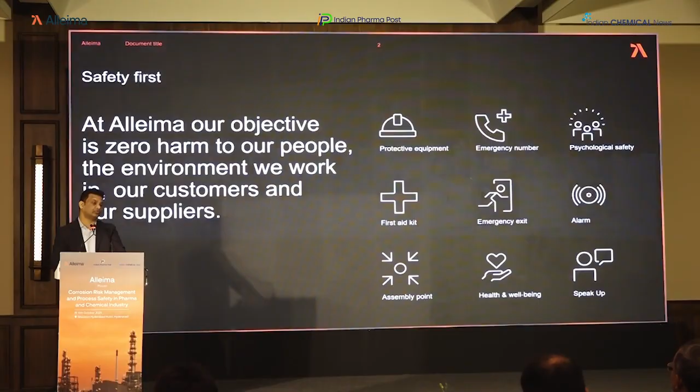So we are not only a product supplier, but also a solution provider. We have an advanced tube manufacturing facility within India and across the globe. So I'll give you some information about the company.

As I told, this is a very old company, 160 years old. We survived so many years because of innovation and because of the culture we have. On 31st August 2022, we became a new brand, Alleima. The word is invented with the symbol A, which pushes the line, representing crossing the boundaries. Allais is the ancient French name, which is called alloy, and MA means material.

So this is the history of the company. We started in 1862 in Sweden, and we kept on inventing newer and newer alloys, and by 2022 we became independent. Some highlights: seamless tubes we started producing in 1888, and in 1985 we invented duplex alloy. This was the biggest innovation we did—two phases, ferrite and austenite, mixed together to become one different material called duplex. That is our invention. And then so on, we kept inventing duplex, then super duplex, then hyper duplex.

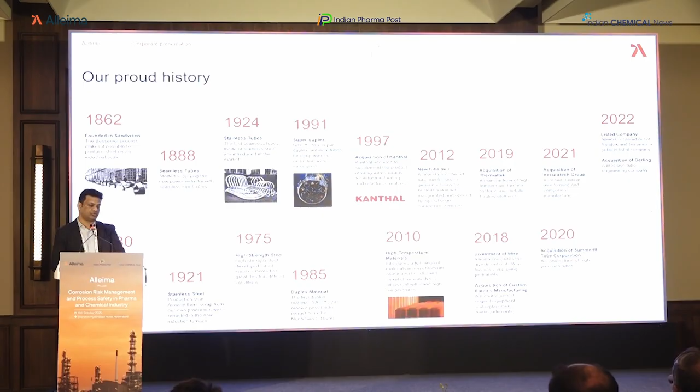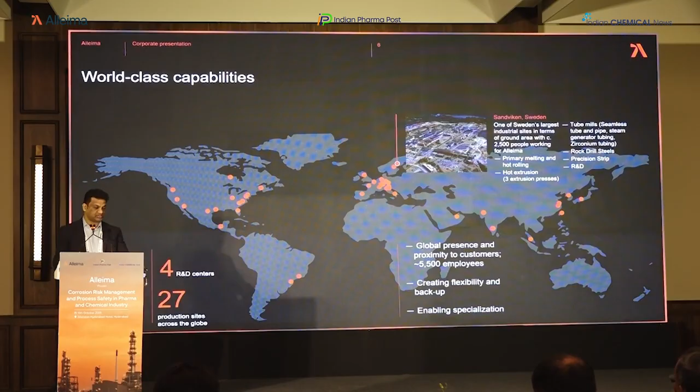So any furnaces or heating material required for heating, resistance alloys we manufacture. We also have some medical companies acquired in other parts of the world. Our base is in Sweden. We have 90 sales offices, 4 R&D centers, operations in 40 plus sales offices, and 27 production sites across the globe.

Sustainable steel—sustainability is very important for us when you look at the environment. 80% of our material is recycled. When I say recycled, it takes a lot of effort to refine the material, and you need to put a lot of production cost into refining it. But it is important to give something for the next generation. So this is the challenge we have taken.

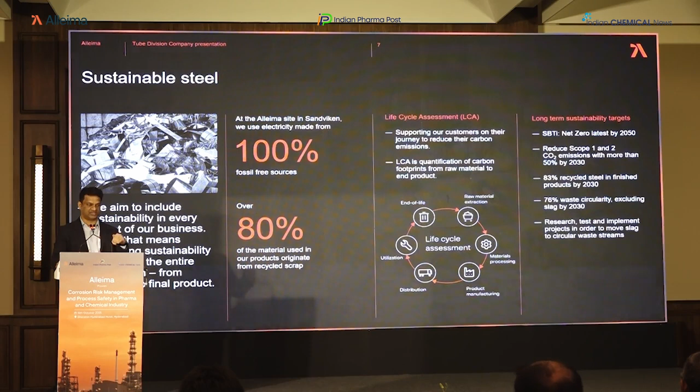Also, in Sweden, we have 100% fossil-free energy consumption. Our aim is to go up to 83% by 2030. Again, from here, adding even 1% is a challenge. So maybe Paresh knows that adding 1% of refined steel—used steel made into reusable steel—is the biggest challenge.

So then we have the tubular solution, which is a bigger chunk of our revenue. Then we sell bars also. Then again, a heating system, as I told you.

We have a precision strip product, which is the flapper valve you've seen in a slide, which is in your refrigerator or AC with a 5-star rating. It depends upon the flapper valve, how many times it opens and closes within a second, that decides efficiency. We have the material which opens 35% more, meaning the intake to the compressor is more, exit is more. That AC will give the effect in the same duration time. So that product we manufacture.

Then we have the medical wires and then coated strips. This coated strip is a new product invented by us, used for hydrogen vehicles and hydrogen energy transformation, which we have developed. The percentage is less currently, but we estimate this will grow in double digits in the near future.

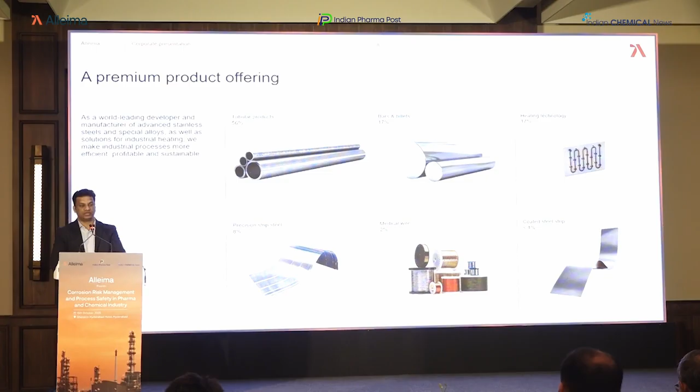So we are there in all the industry sectors, right from refinery, industrial chemical, specialty chemical, oil and gas, then heating materials, then consumer products - for example, if you're using Gillette, the steel used by Gillette is manufactured by us. We've invented and changed the recipe over many years to give more shaves, because we've added certain elements to give the edge retention property required for that material. So in some way or the other, we are touching your life from the day you start.

So then we have into power. Nuclear is the biggest sector for us - we supply steam generator tubing in the nuclear sector. Then we are into mining sector. The aero industry is also a biggest industry for hydraulic and instrumentation tubing, where we supply titanium tubes.

Medical is another industry where we have a wire developed for cochlear implants, invented 10 years back, and we hold the patent. We have a tie-up with an Australian company. So those across the world who are born deaf can hear because of the wire we produced, since we've added certain elements which give vibration and convert it into sounds.

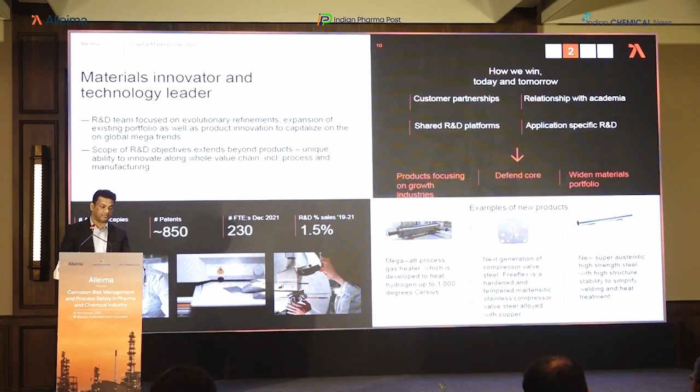So we have a fully integrated value chain. When I talk about a fully integrated value chain, it means we melt our own alloy - we're not buying anything from the market. And our development starts from the innovation.

So we have tie-ups with many licensors. They come to us if they want to change any pressure, temperature, or chemical composition, then they throw a challenge to our R&D - this is what we wanted to develop - and then we tie up with them and develop alloys. Certain tests take long, and we have industry partnerships with universities to take their help. We have our in-house R&D facility and a lot of equipment where we can do trials along with customers as well as licensors to develop new alloys.

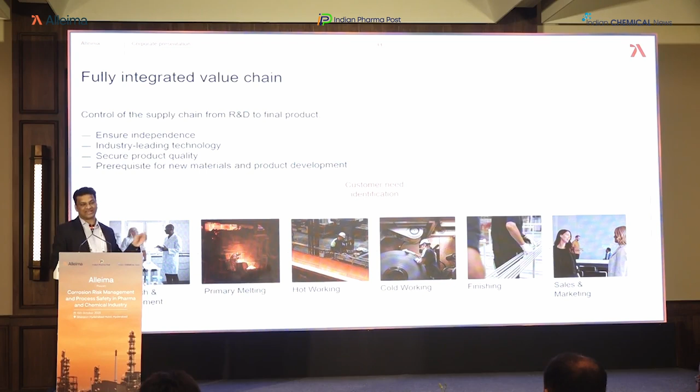And then we go for the melting of that alloy, then hot working, cold working, finishing, and the last step is sales - I stand last. So R&D stands first for our company.

So I will give you a glimpse about how a tube is manufactured. This is of course a visual, but you will get a fair idea right from melting to the finishing of how a tube is manufactured.

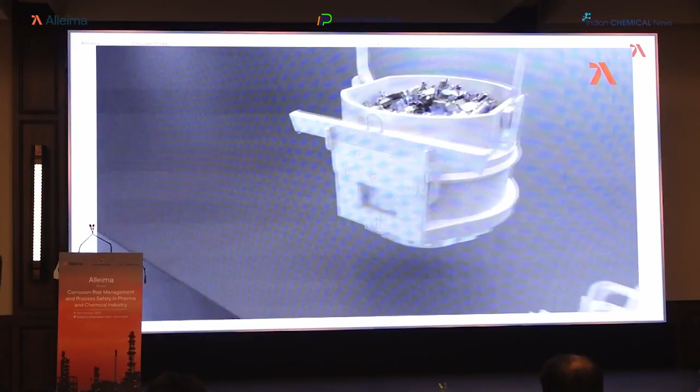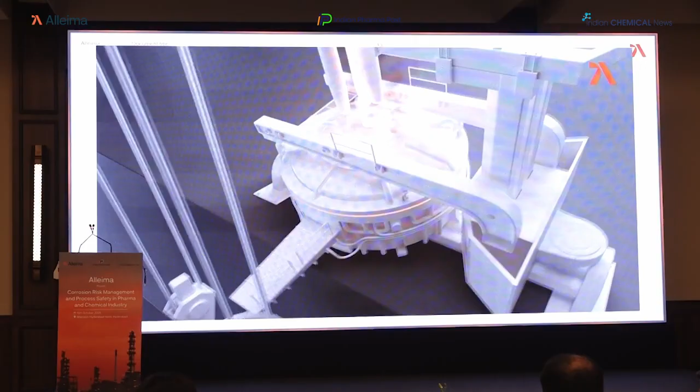At Alleima, manufacturing is based on recycled steel and purchased alloy materials. We buy high-quality scrap only from certified suppliers. The raw material is analyzed and any harmful ingredients are carefully removed. The scrap is melted at 1,600 degrees Celsius in an electric arc furnace. In the argon-oxygen decarburization vessel, carbon content is reduced to stainless steel levels.

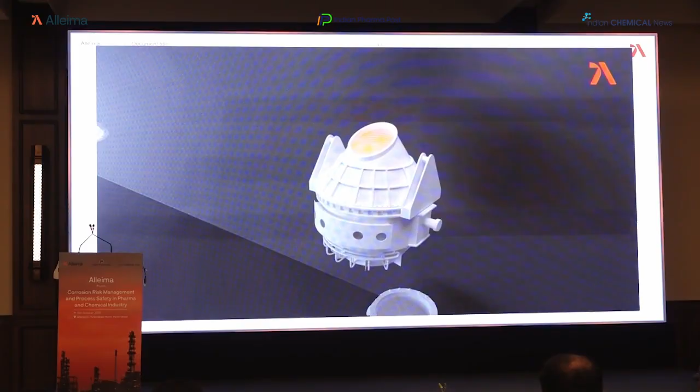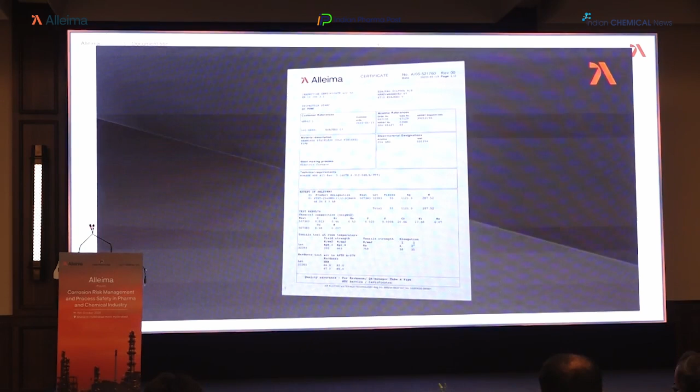Exhaust gases from the furnaces and AOD processes are filtered to cut pollution, and the dust extracted is further processed for metal recovery. The chemical composition of the melt is closely monitored throughout the process to meet our own demanding standards. We make continuous analysis to guarantee the correct steel grade and ensure traceability and consistency between batches. The results are entered in a form that accompanies each batch at every stage of the process.

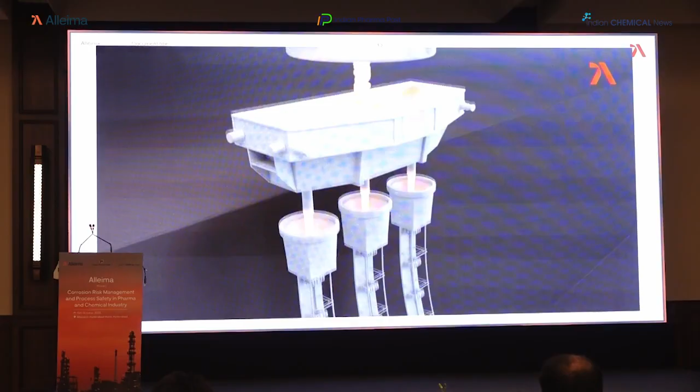After pre-rolling of continuous cast material or ingots in the blooming mill, billets are transported to a heating furnace to be reheated to the correct rolling temperature.

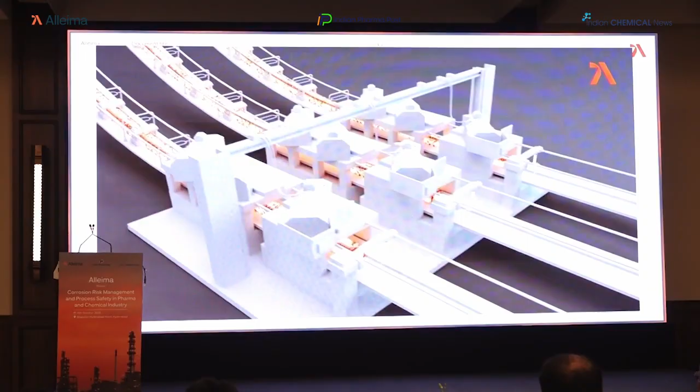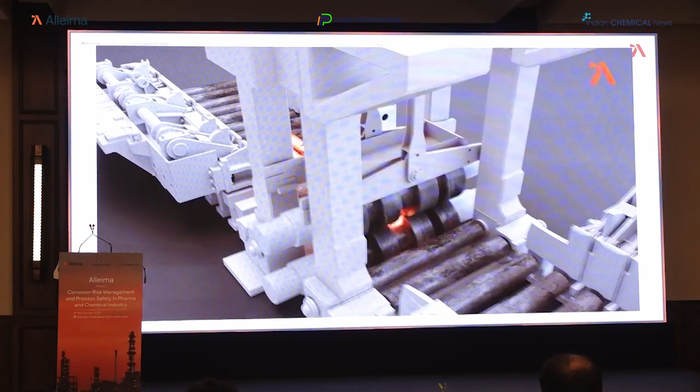The billets are then rolled in Alleima's modern rolling mill, where round and square billets are rolled to a wide variety of sizes. The new mill provides quick product dimension changeover, short lead times, energy savings, and excellent product quality. The mill is integrated with the blooming mill to form one continuous production line.

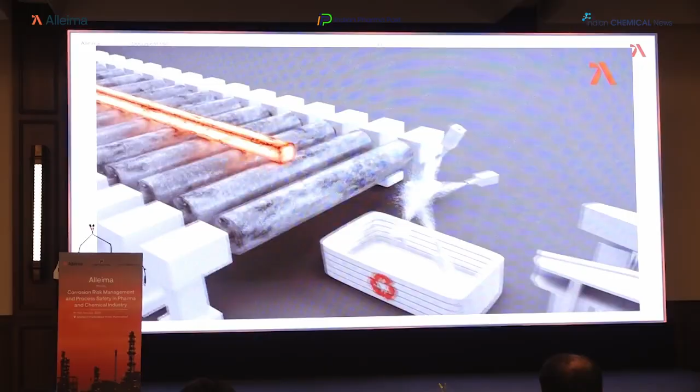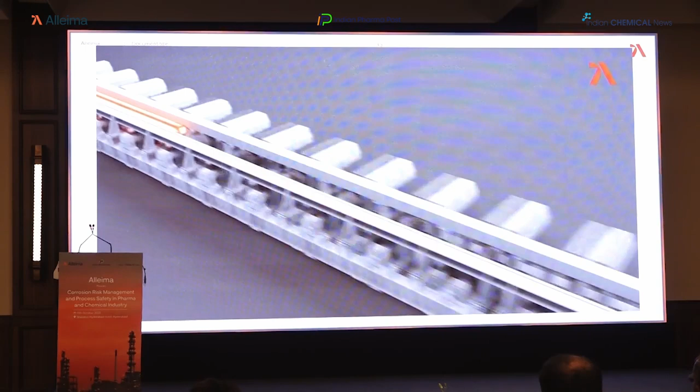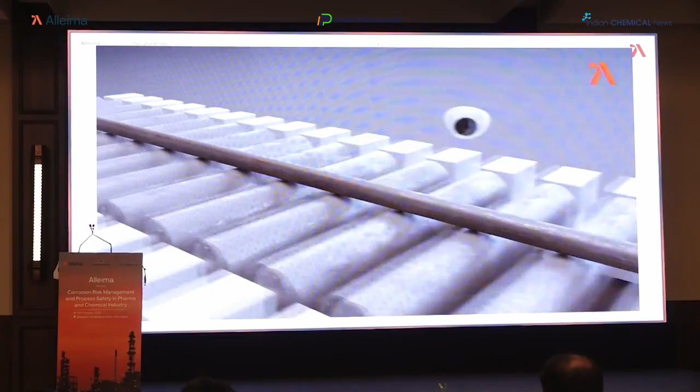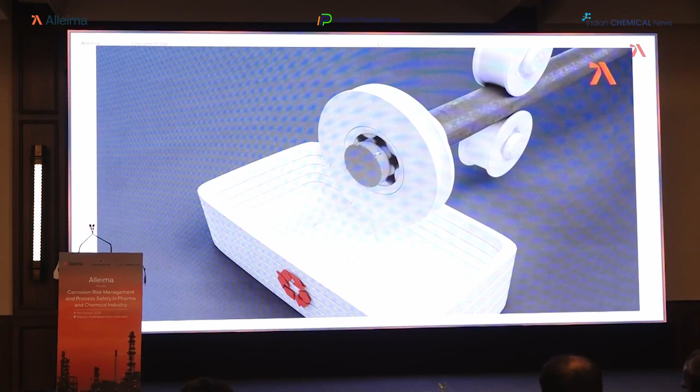Billets and bars are rolled to finished size in 1 to 6 passes, and cut into requested lengths. The bars are inspected before dispatch or put through further internal processing. Full traceability is maintained throughout the manufacturing process. Before the bar steel is used for tube manufacturing, its chemical composition is confirmed in a spectrometer test.

To prepare extrusion billets, the bars are peel-turned, cut, and deep bored.

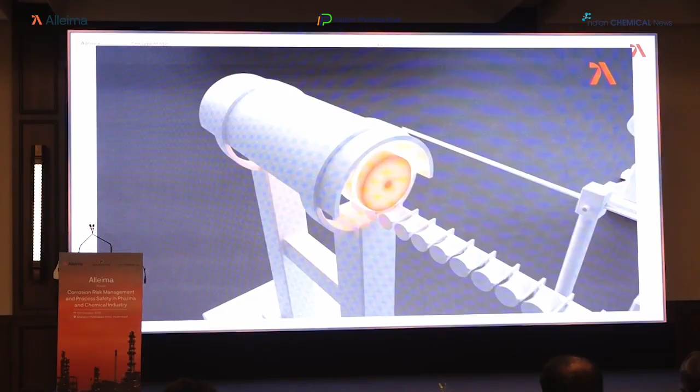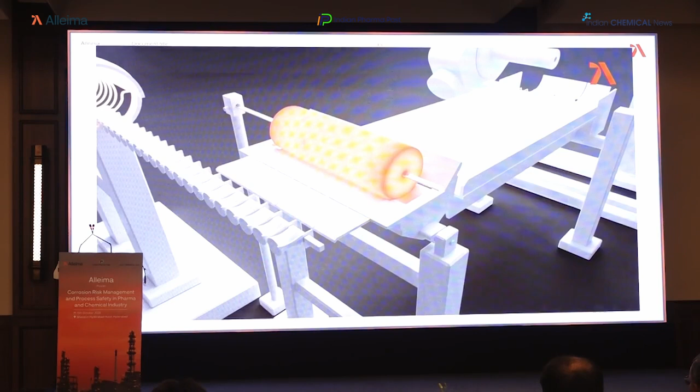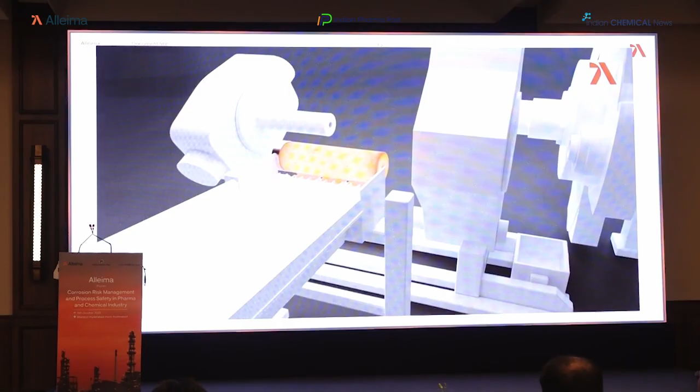The extrusion billet is heated to about 1,200 degrees Celsius, and then lubricated internally as well as externally with a glass powder. A mandrel is inserted into the hole in the billet.

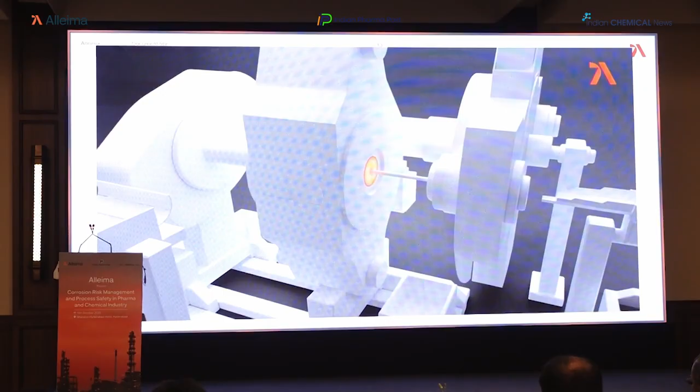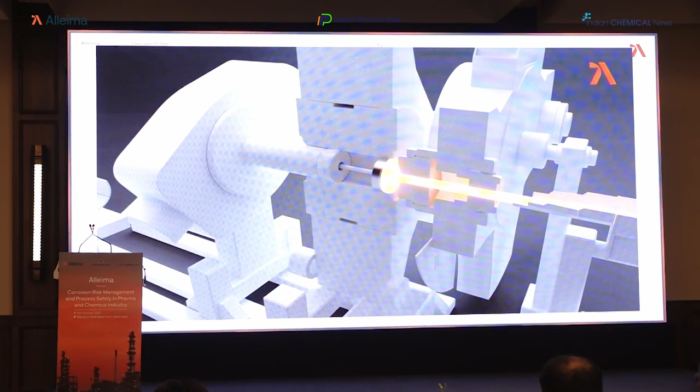When extrusion begins, the billet is pressed out between the die and the mandrel, resulting in a seamless tube that can be delivered directly without further processing through cold working, according to customer specifications, or used as the starting point for further processing.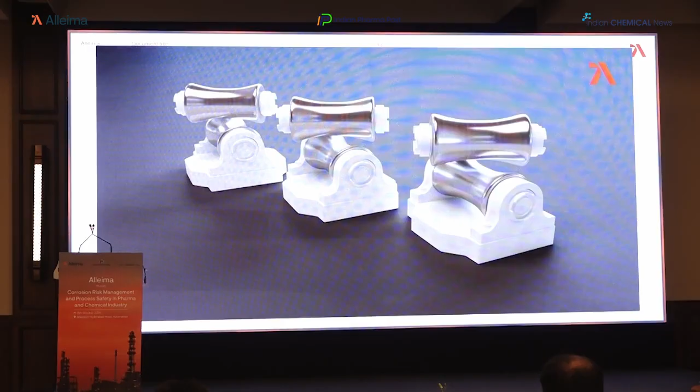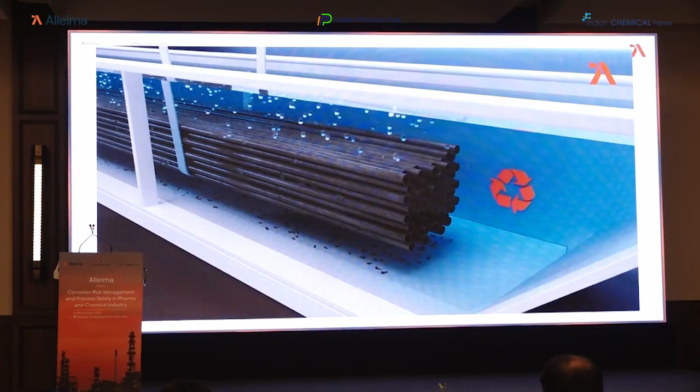The extruded tubes are rapidly straightened and pickled in acid to remove glass and metal oxides. After deburring, dimensional checking, and inspection, the tubes are ready for final production.

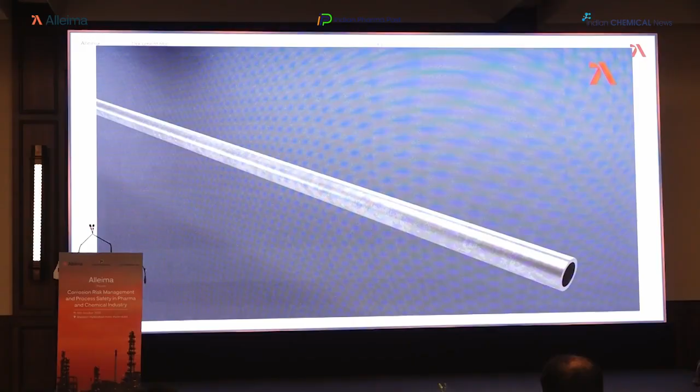Following visual inspection and X-ray spectrometry, the tubes pass through the pilger mills to re-establish material structure and hardness.

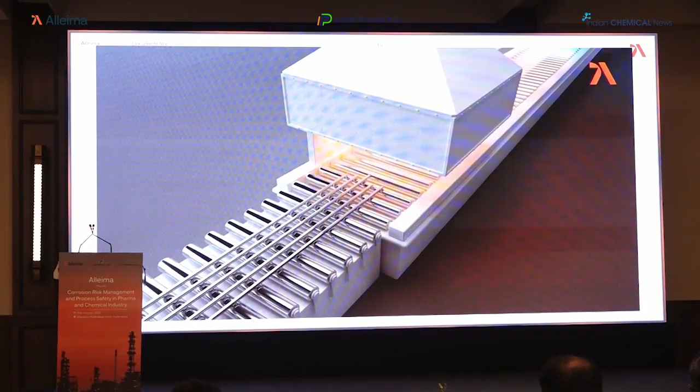The tubes are then heat-treated in an annealing process. They are heated to over 1,000 degrees Celsius in a protective atmosphere to prevent oxidation, and then rapidly cooled to about 300 degrees Celsius.

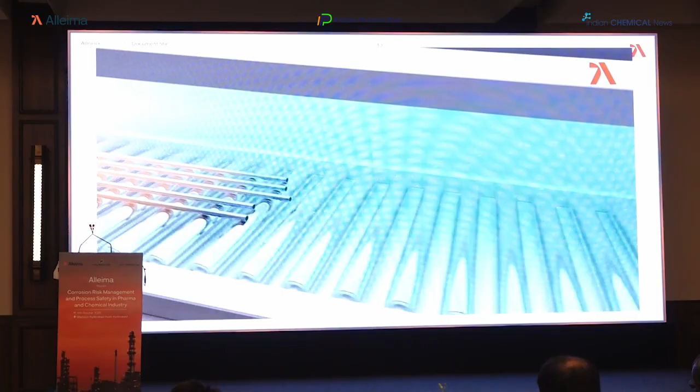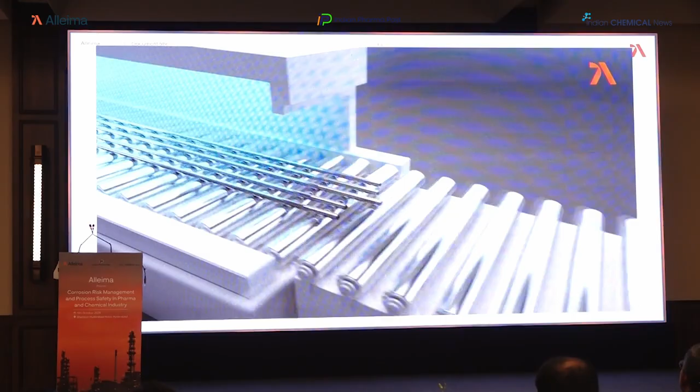The tubes are straightened, polished, and thoroughly cleaned.

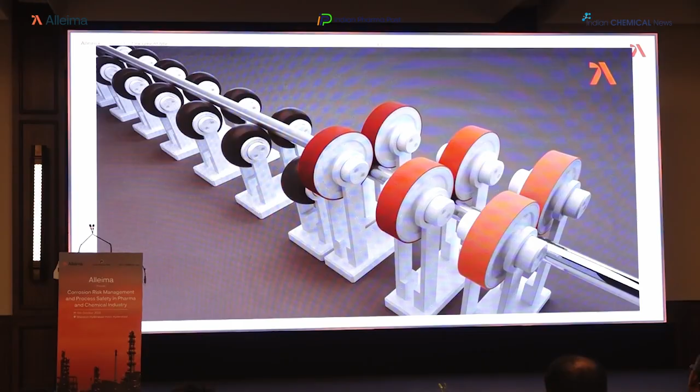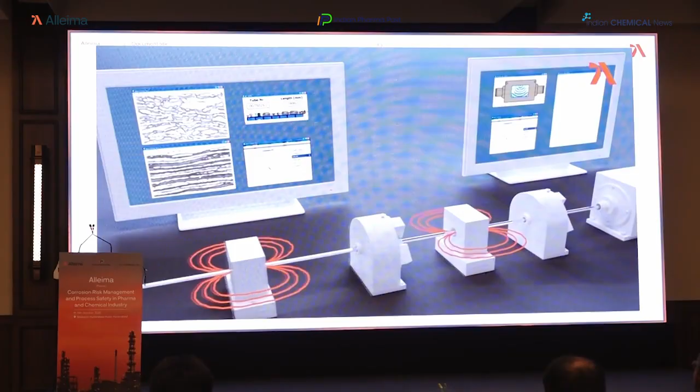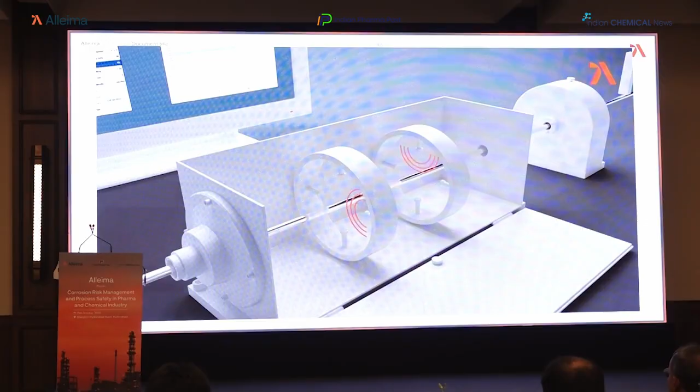According to customers' requirements, the tubes are fully inspected for defects using ultrasonic and eddy current testing methods set to detect the tiniest defects such as cracks, cavities, or other material defects that the naked eye can't detect. Their dimensions are verified and they are also checked to ensure they are free of intermetallic phases.

This is followed by visual inspection. The destructive testing stage includes flaring, flattening, and tensile strength tests. Corrosion and microstructure properties are also verified. Such tests are crucial to ensure the material meets customer specifications.

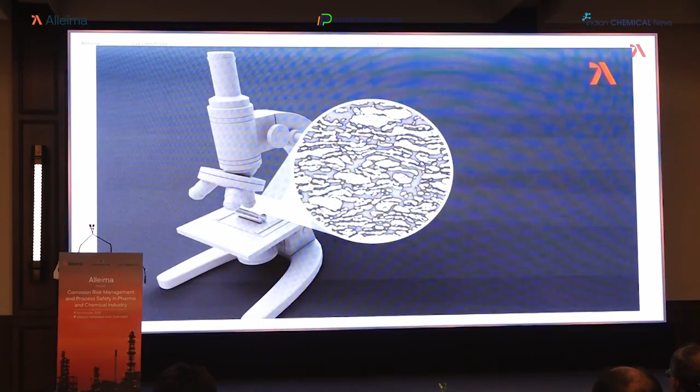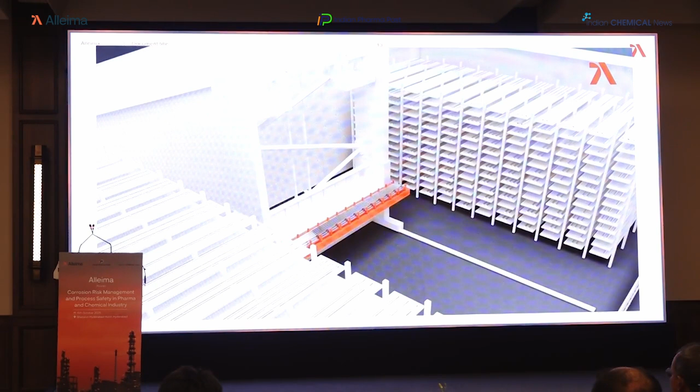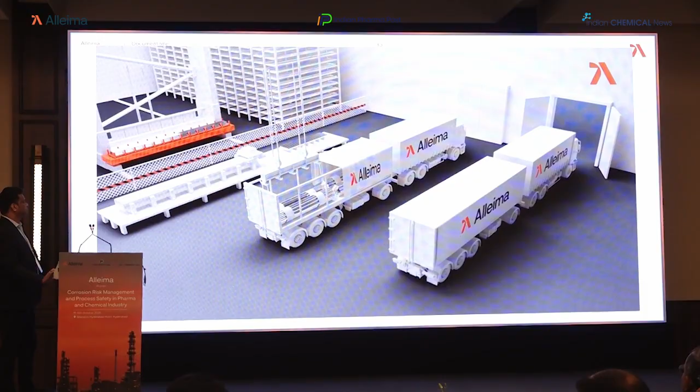The tubes are stored in Alleima's fully automatic stockroom, from where they are eventually selected, packed, and loaded onto trucks for further distribution to their final destination. The tubes are delivered together with complete documentation. Alleima has now fulfilled its commitment to deliver stainless steel tubes of superior quality.

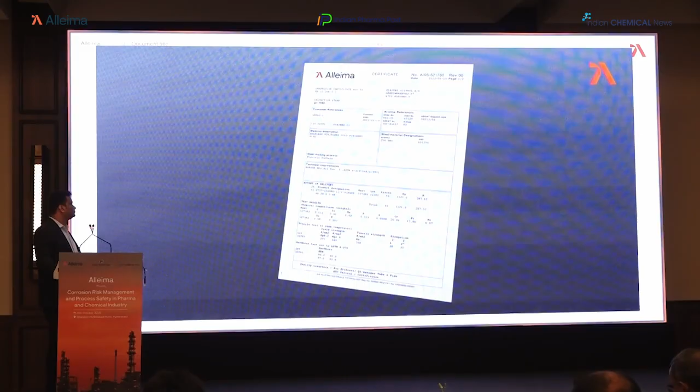Well, that is all about the tube manufacturing process, and everywhere across the globe we follow the same process. In all the manufacturing plants, we have a standard quality system which is monitored by Sweden R&D and quality system. The plant in India also has to go through the audit procedure, internal and external audit. And we give a lot of thrust on automation and digitalization when it comes to plant operation.

So you have seen the manufacturing process, what we manufacture, the tubes. We have an integrated manufacturing facility right from melting to tube manufacturing production. But if you buy a tube, there are two universal methods: hot working and cold working. What you buy for heat exchangers is a cold worked tube.

In hot working, there are two methodologies to manufacture hot worked pipe. One is hot extrusion, what we follow, and another method is the hot piercing method. Hot piercing is an old method, hot extrusion is a newer version of it, improving the quality.

This is the latest technology. In any material, the last portion which solidifies is the center, and all the impurities get segregated at the center. This is called impurity, and we need to remove that impurity.

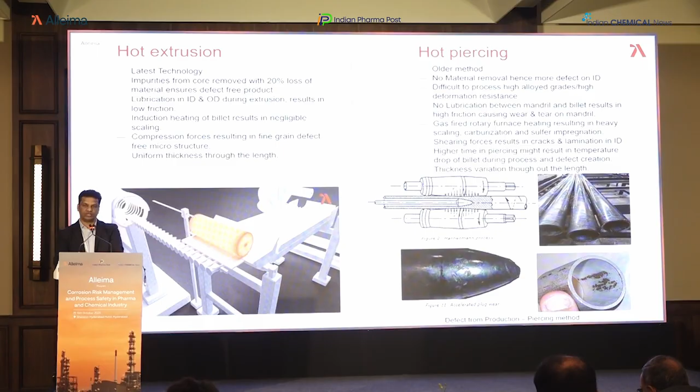We use a unique glass lubrication to make sure metal-to-metal contact is avoided when tubes are manufactured, whereas with hot piercing there is a lot of metal-to-metal contact. This is a hot extrusion process, so the hollow is lubricated on both the ID and OD side with glass lubrication. This becomes what we call mother hollow or mother pipe, used for manufacturing heat exchanger tubes.

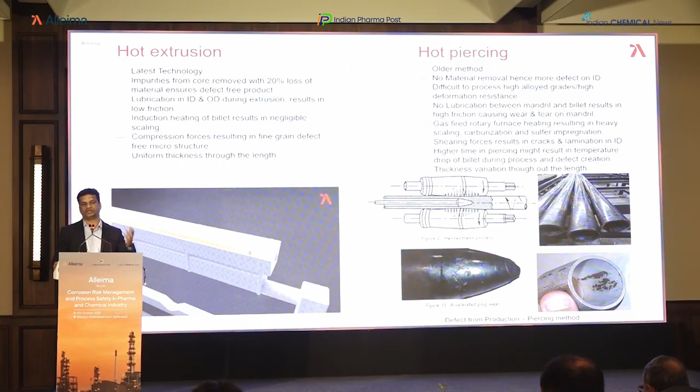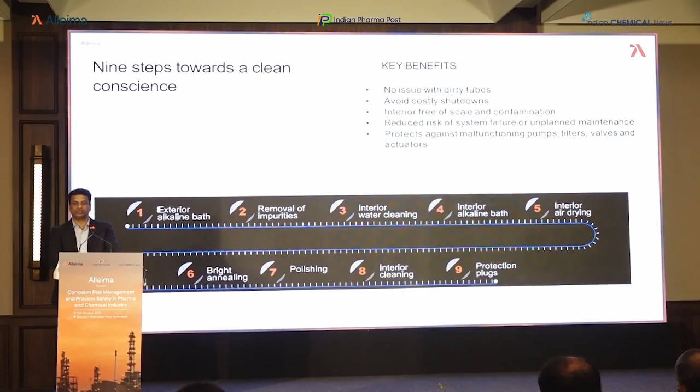Then we use a 9-step cleaning process. This is very important when tubes are produced. I have a video in the next slides where you will see the nine methods we use for cleaning the tube.

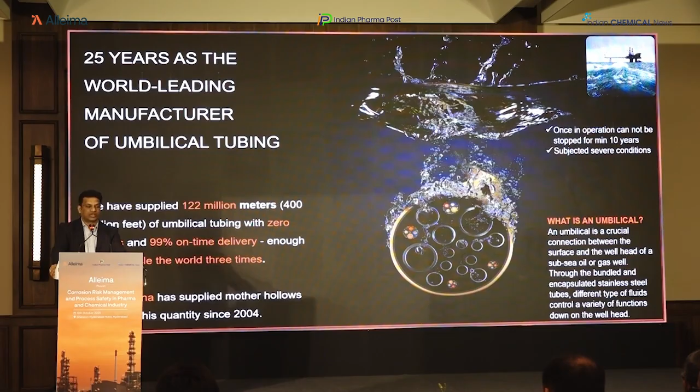Then here comes the application called umbilical tubing. It is very challenging, where the testing requirement is as good as or slightly more than nuclear tubes, because these tubes go subsea to extract oil from the well. We are the leader in supplying these tubes. By 2024, we have supplied tubes that, to give you an idea, would wind around the earth three times. That much we have supplied, 99% on time with zero failure and no defects, because defects are not allowed here — if a well fails, there are $1 million losses. So we keep inventing in this area, and it remains a major application for us.

As we've mentioned, we are now manufacturing within India as part of Make in India. All the technology is transferred to India from Sweden, and we have a local presence within India in Mehsana.

We manufacture grades — this is our capability for hot finished pipes, from 65 mm tube up to 15 meter length, whereas cold finished heat exchanger tube we manufacture up to 30 meter length, from 12.7 to 50.8 OD. Cold finish tubes like hydraulic and instrumentation tubing range from 6 mm to 16 mm. Apart from that, we manufacture all alloys like titanium, zirconium, bimetallic tubes where zirconium is inside and stainless steel outside, composite tubes with carbon steel outside and high nickel alloy inside. These technologically advanced tubes are manufactured in Sweden, not India, because they require a lot of investment and furnaces, but they are part of our portfolio.

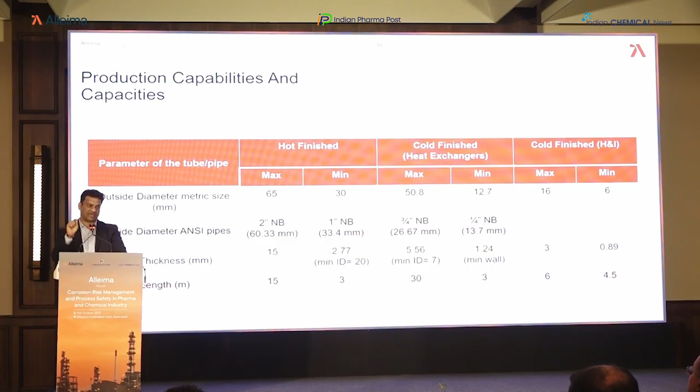We also manufacture medical tubes, with 1 mm OD, still having a hole, used for medical applications, manufactured in Sweden.

Hydraulic and instrumentation tubing are used, of course, for your complexes, and we do an energy audit for you. We have partners who do an energy audit and give you a report on which location the leakages are happening, how much leakage per hour, per month, and per year, and how much losses — because these are non-accounted losses, the last portion where you neglect the losses since they don't seem to contribute, but they are big losses. When you do an energy audit, you come to know there is a possibility of saving here.

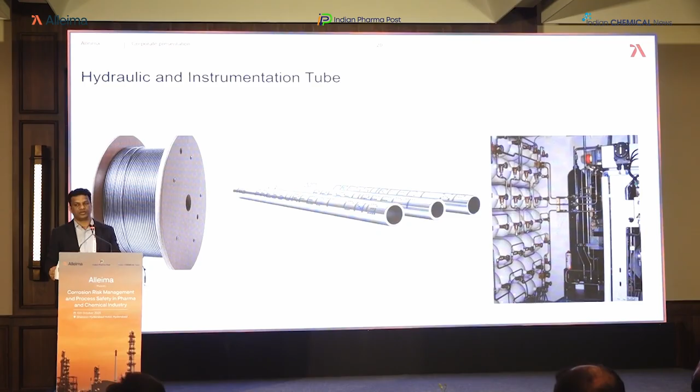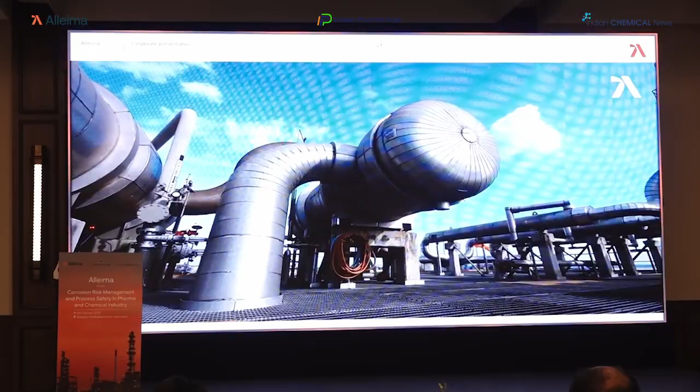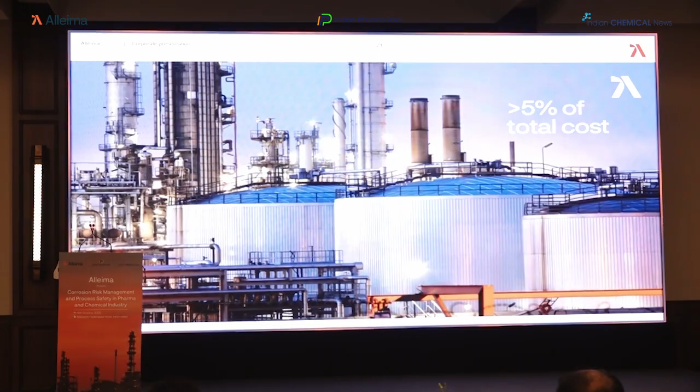Every day, industry relies on hydraulic and instrumentation tubing to secure safe, trouble-free operation of key equipment and systems. From renewables to petrochemicals to high-pressure compressed natural gas, there's no room for unscheduled downtime due to leaking valves or fittings, which could cause a system failure. In complex systems, tube makes up less than 5% of the total costs, but shortcuts on quality can lead to much higher costs in the end. So to avoid risks and gain peace of mind, it really pays to use premium quality seamless tubing from Alleima.

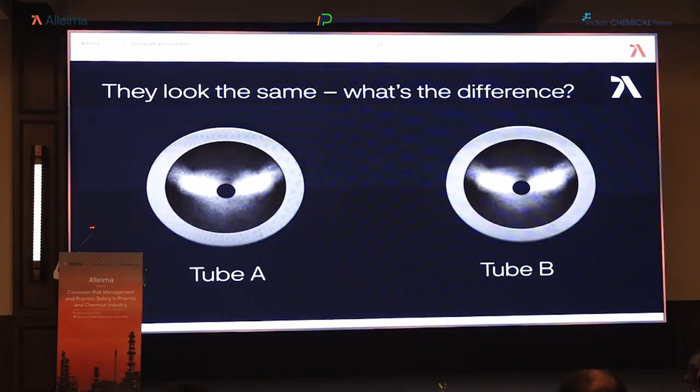But admittedly, it's not easy to see the difference between Tube A and Tube B. Tube A here is a high-quality grade from Alleima, produced with 83% recycled steel in a sustainable process refined over 160 years. But even Tube A can get lost in the mix, since many grades meet the standards for ASTM, ASME, ISO, and so on, even if only barely.

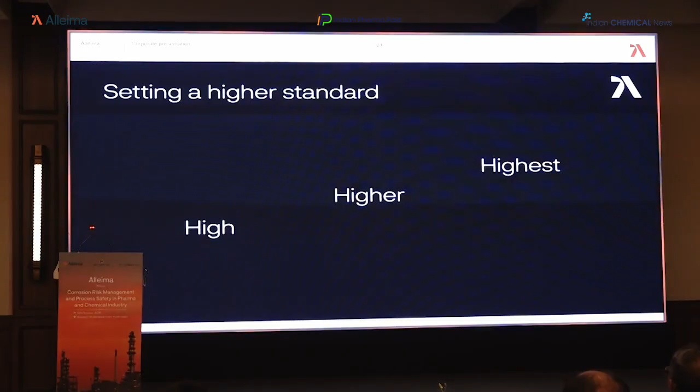At Alleima, we don't settle for good enough. We always strive to set the standard within the standard to make sure you get the highest quality. It all starts with our in-house melt in Sandviken, Sweden, where we can control and optimize the chemical composition to deliver properties like higher corrosion resistance.

Here, you can see how Alleima 3R60 tube, for example, offers superior corrosion resistance compared to the standard 316 or 316L grades, achieving a PRE of 27 versus the international minimum of just 23, thanks to ensuring the optimal chemistry of chrome, nickel, and molybdenum.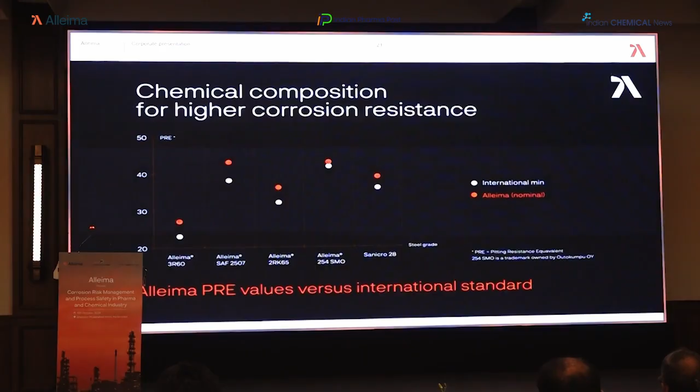And here, if we take 5 popular Alleima grades, including SAF 2507 Super Duplex and higher alloy Sanicro 28, you can see how Alleima PRE values exceed the international standard.

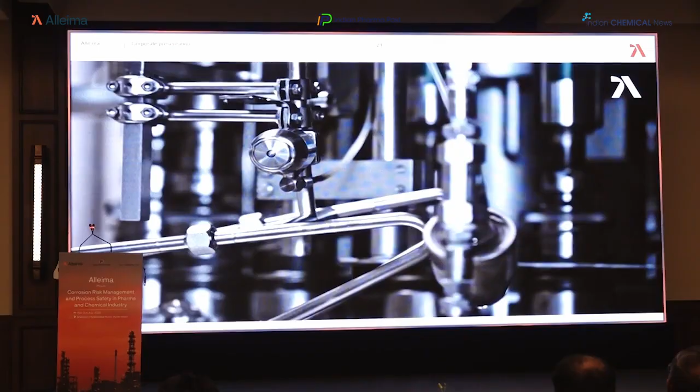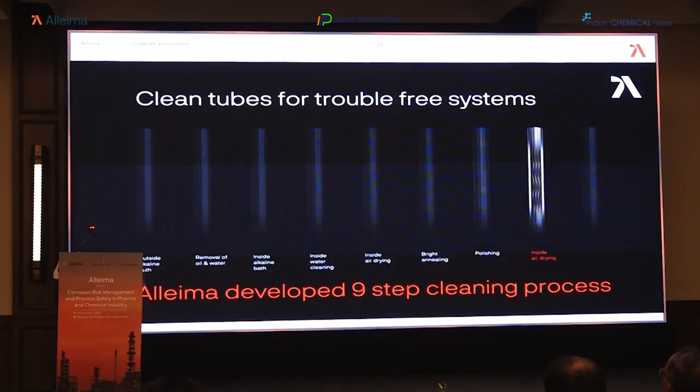In our finishing operations, we take extensive measures to ensure you always get ultra-clean hydraulic instrumentation tubing. Our aim is to ensure safe and trouble-free operation with every tube delivered. That is why we use a comprehensive 9-step cleaning process, from flushing with alkaline baths to drying, bright annealing, polishing, and finally, adding protective plugging.

To sum up, clean hydraulic and instrumentation tubing means that you get reduced risk of system failure or unplanned maintenance, prevention against malfunctioning valves and actuators, and an inside surface free of scale and contamination.

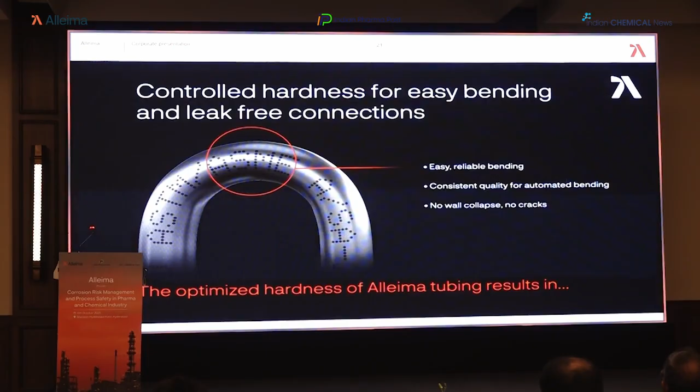But how do we perform on bending and fitting? The secret lies in controlled hardness, which allows for easy bending and leak-free connections. Whatever the standard, our grades are always optimized to ensure easy, reliable bending, consistent quality for automated bending, no wall collapse, no cracks, and less use of power.

Optimized hardness also ensures you get a vacuum-tight grip of the ferrule in the connection, preventing leaks and assuring consistent pressure and flow.

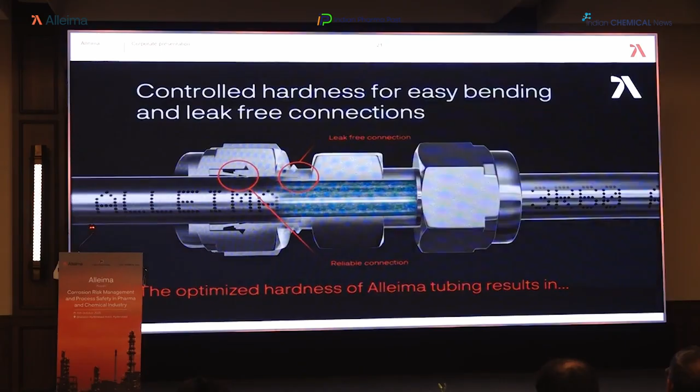Consistent ovality and tight tolerances set Alleima tubing apart and help prevent the risk of leaks. Our outer diameter tolerance often far exceeds the ASTM requirements.

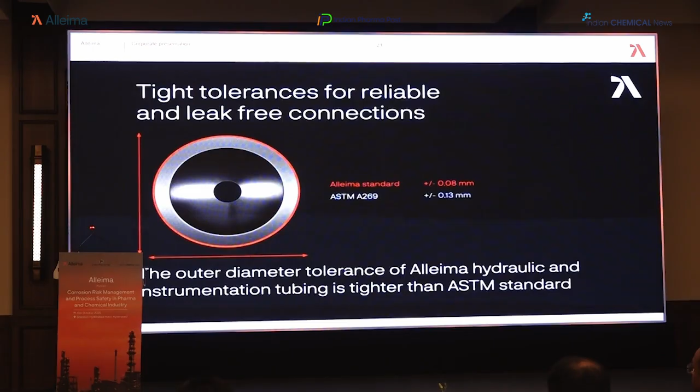For example, for A269 category ASTM grades like 316 and 316L, the requirement is plus or minus 0.13 millimeters, whereas we consistently deliver plus or minus 0.08 millimeters with every batch. Naturally, a key benefit of our tight dimensional tolerance is a perfect leak-free connection.

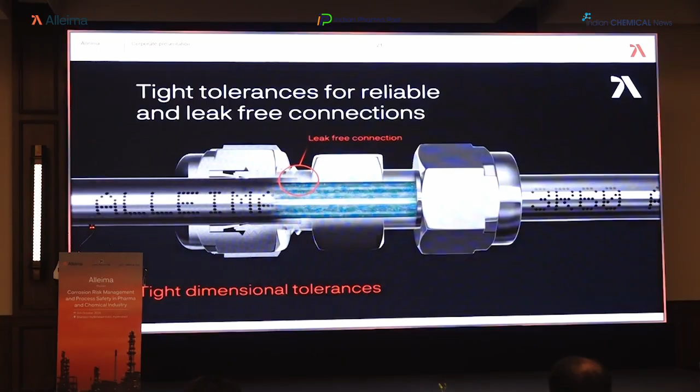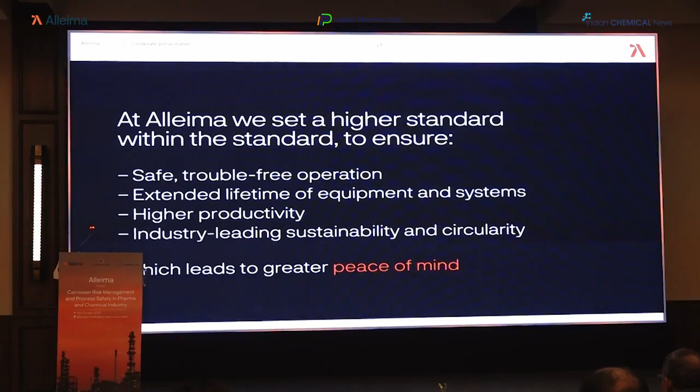So we supply clean tube with very low hardness when it comes for hydraulic and instrumentation tube. We can supply the tube below 85 HRB hardness, which is very crucial. When you bend the tube, you'll find no crack and no leak in the tube.

So some of the applications globally used by various customers, and we have a lot of references along this. Alleima 2RE10, which is the grade used for nitric acid application, and a lot of the licensors recommend this grade. And here within India, those companies who are manufacturing nitric acid plant, they are getting life of 32 years. We have the reference list. You can cross-check with them the life of the equipment.

Then Sanicro 35 is the new alloy, what you will hear from our colleagues. This alloy is developed to fit the gap between austenitic steel and high nickel alloys, like C22, C276, where you don't have a choice to go for high nickel alloys. There we fit in, and this is the invention done by us to bring the cost down without compromising life and properties of the equipment.

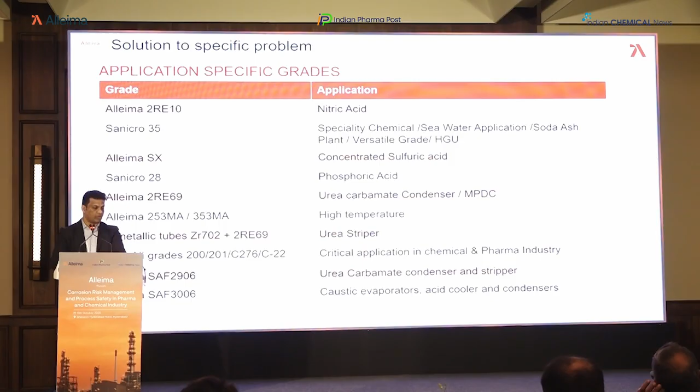Another grade is the SX, which is used for sulfuric acid application, and it gives excellent life when it comes to the concentration of sulfuric acid. Concentration of sulfuric acid is more than 98%. Of course, you'll hear more alloys.

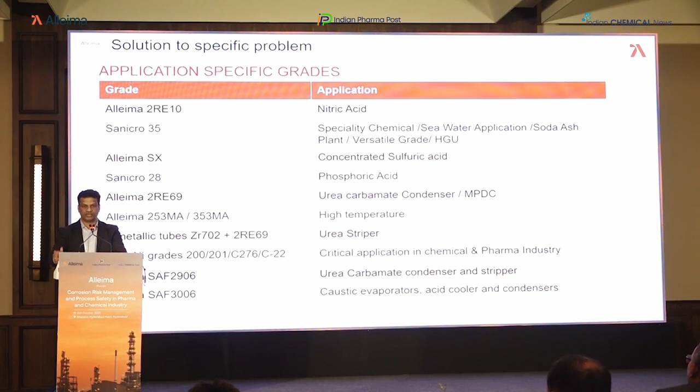One of the alloys is bimetallic alloys, which is recommended by many of the licensors in fertilizer complex for urea stripper, which gives a highest life of 35 years. In one of the German plant within India, we have recorded life of 31 years in one of the plant.

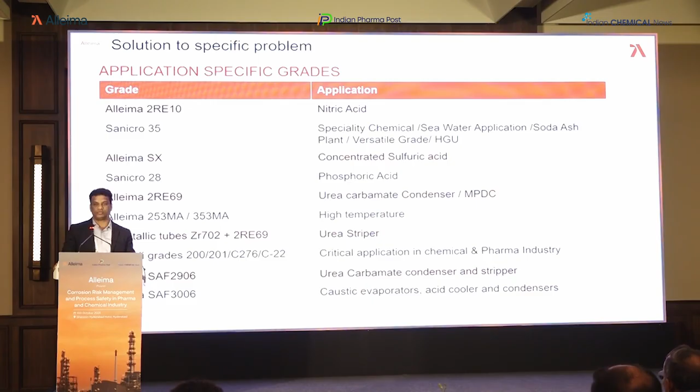And then some of the new alloys, of course, my colleague will talk about it. And thank you very much.

And we have done many failure analysis cases, around more than 300 cases. Some of the samples we have displayed, how tube fails. Of course, these are not our tubes. These are supplied by industry, and we have local R&D where we do a lot of investigation on failure, why it has happened. We have displayed some of them. You can check with our team about this. And thank you very much for listening.